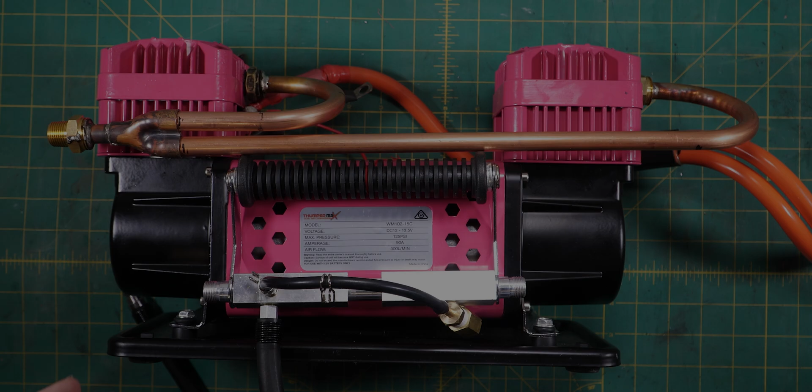In this episode of Lock Your Hubs 4WDing, we're fixing the external plumbing of the Thumper Max II. We're going to replace this low flow standard outlet manifold with a custom copper high flow outlet manifold that anyone can build with basic hand tools at home.

First up though, we need to understand how a reciprocating piston air compressor works. So let's have a look at that.

On the left hand side we've got the induction stroke, and on the right hand side we've got the compression stroke. It's very similar in operation to a two-stroke engine. Now we've got the crankshaft here, of course driven by that electric motor that's sucking down 90 amps.

We have the conrod here and the piston here. As you can see, the big end of the conrod is connected to the crankshaft but offset, with the small end connected to the piston. So as this turns clockwise, it drags the piston down.

When that happens, because of the seal between the piston and the piston wall, it creates a partial vacuum here. That then opens the reed valve and sucks air into the inlet.

And now for the compression stroke. As the conrod big end moves past bottom dead center, it starts moving back up towards the top, which in turn pushes that piston back up.

Now if we have a set amount of air inside that cylinder but we're reducing the volume, it increases the pressure — that's Boyle's law. When it gets to a certain pressure, it'll open that reed valve and push it out the exhaust, and then we can do actual work with it, like inflating our tyres.

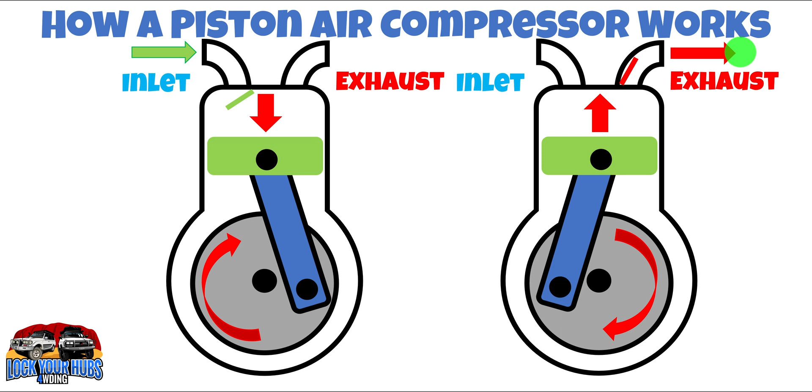And that's the basics of how a reciprocating piston air compressor works. Now that we have a better understanding of how these piston air compressors work, let's baseline this setup to find out how fast it turns with a standard outlet manifold.

Ordinarily, all I do is put a bit of reflective tape on the rotating assembly, point my digital tachometer at it, and Bob's your uncle. Unfortunately, our rotating assembly is under here and runs right through the middle, so I can't see it optically, but I can see it in other ways.

I thought to myself, perhaps using a pressure transducer like this one, I could see the peaks coming out of the outlet tube — one peak per cylinder per revolution. They'd be 180 degrees out of phase to one another. So all I'd have to do was look on the oscilloscope and measure the difference between three peaks, and that would give me the time.

But then I thought, hang on, I'd heard of this thing called a relative compression test. What that does is use a current clamp like this one in combination with an oscilloscope, and it reads the amount of current the DC motor's taking.

When the piston's heading up the bore, it takes more effort and uses more current, and the same on the other side. So what I'll be able to do — we'll shift to the screen in a second — is turn on the compressor for a second, freeze frame the output, and measure between our peaks to get the revolution speed of this Thumper Max.

And here's the standard head in all its glory. These are the inlet ports here, and on the reverse side are the exhaust ports. This is the cylinder side where the piston is.

Using a vernier caliper, we can have a look at what is the appropriate size pipe to use for our outlet manifold. You've got two inlet ports and two exhaust ports. The inlet ports measure about 6.75 millimeters across each, and the exhaust ports measure about 5.3 millimeters across each. That gives us a total inlet area of about 72 millimeters squared and a total exhaust area of 44 millimeters squared. You'll notice the inlet is a lot larger than the exhaust.

There's a reason for that. You have an ideal inlet to exhaust ratio of usually around 1.2 to 1.5 to 1. The reason is, when you're on the induction stroke, you only have atmospheric pressure, or 1 bar or 14.7 psi of pressure outside that cylinder, pushing air back in to fill up that vacuum. However, on the exhaust stroke or compression stroke, you've actually got pressurized air pushing it out. So your exhaust port doesn't need to be nearly as big as your inlet port.

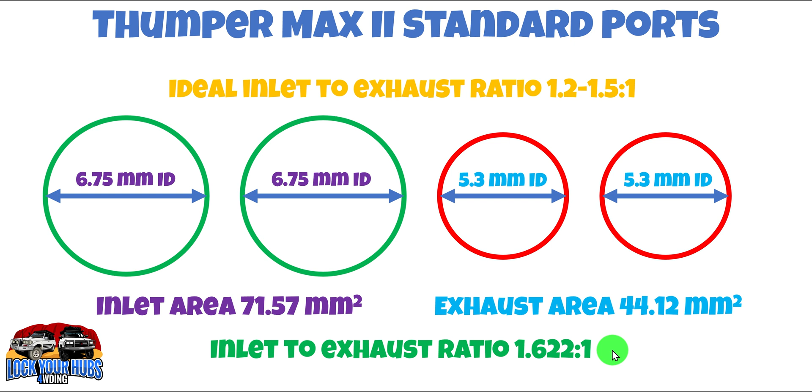Now the inlet to exhaust ratio of the Thumper Max standard works out to be 1.6 or thereabouts to 1, so not too bad. But as I say, I can't leave well enough alone. We're going to have a look at how big exactly we can hog out these exhaust ports in order to get this Thumper Max pushing as much air out as possible.

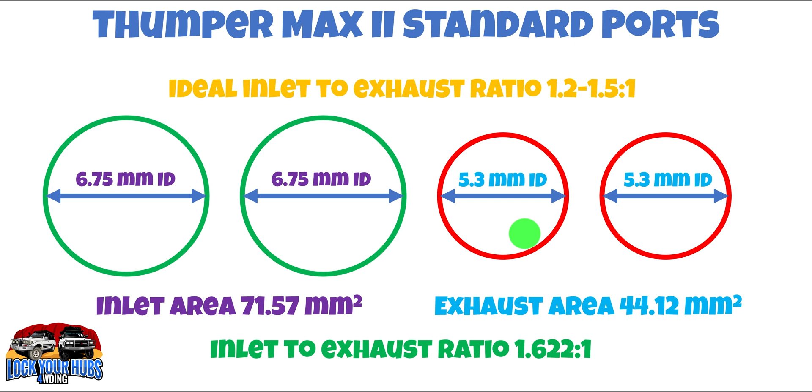And here lies the rub. Whilst our exhaust port is 5.3 millimeters, we still have an O-ring to contend with. That's a problem, because if we go drilling that out, let's say 10 millimeters, we're not going to have an O-ring sealing surface left and the thing's not going to work properly. The ID of that sealing surface is 7.5 millimeters, and we still need some material in between this point and the edge of our port in order to support that O-ring.

I figure I'm willing to go to 6 mil. So I'm going to drill these out to 6 mil and suck it and see. I'll let you know in the description if it doesn't work for me. But that's still an increased area of around about 28%.

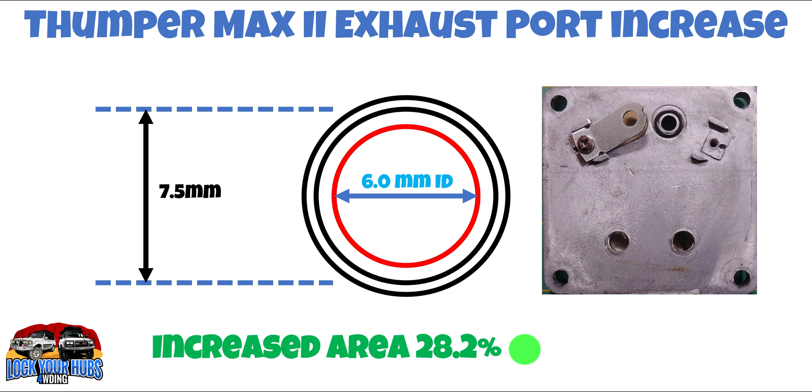And now we know the exhaust port size we're dealing with, we can start making intelligent choices as far as the inside diameter of the exhaust manifold we'll be fabricating. Here's our two freshly bored out 6mm exhaust ports, and that gives us a total exhaust area of about 57mm squared.

Let's have a look at a couple of different options of copper pipe we can use to create this exhaust manifold with: 3/8 and 1/2 inch. Now 3/8 copper pipe has an ID of 7.7 mil and an area of about 47 millimeters, whereas 1/2 inch is about 10.9 millimeters ID and has an area of about 93 millimeters squared. So our 3/8 pipe will be 18% undersized. It will provide a restriction.

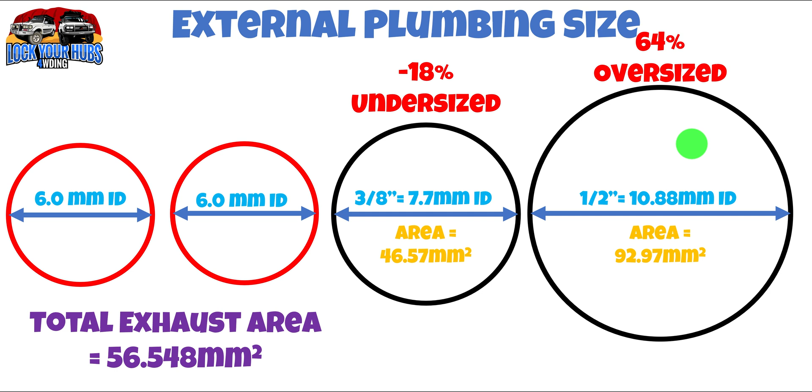What about our 1/2 inch pipe? Well, that's 64% oversized, so that should be fine, right? Or is it? It might actually be worse. Let's have a look why.

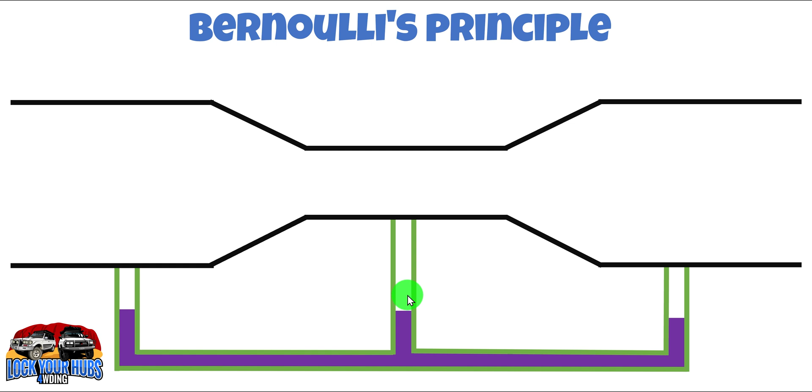And the reason is Bernoulli's principle. Bernoulli's principle states when you go from a larger to a smaller cross-sectional area, the smaller cross-sectional area will actually increase the flow rate, but the pressure will drop off counterintuitively. And when we go back to a larger cross-sectional area, the pressure will increase and the flow rate will drop off. This is a water manometer, and all a water manometer does is react to the amount of pressure in the system. So if we have low pressure here, water goes up the column, and if we have high pressure here, water goes back down the column.

So we'll flow some air through and see what happens to that water manometer. You'll see at this point in the system, obviously the pressure has dropped off even though the flow rate has increased, and the water has gone up the column. But you'll also notice a differential in height between this point and this point here.

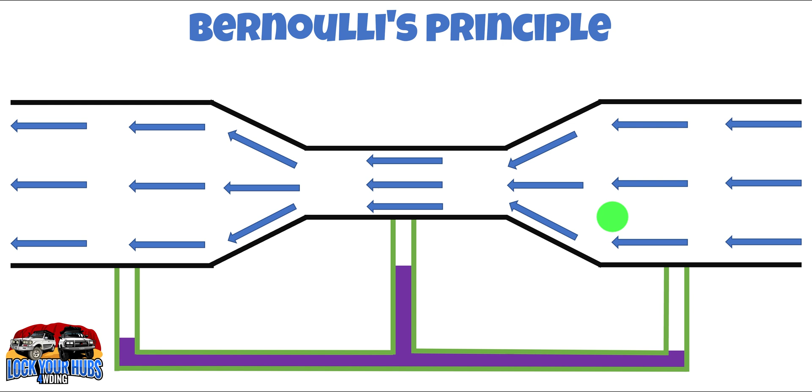The reason is we actually lose energy from the system when we go from one cross-sectional area to another. We lose energy, and that means less efficiency, and that means our tyres are slower to pump up. So the takeaway from this is to minimize the number of cross-sectional area changes you have in the system, and of those changes, minimize the delta, minimize the size differential between one cross-sectional area change and the next.

Because I was using plumbing fittings to create the exhaust port, I decided to drill and tap the head outlet port to a standard plumbing fitting thread. The one I chose was 3/8 BSP, which stands for British Standard Pipe. It's actually a tapered thread, so it's self-locking, even though you've got to use a little bit of Teflon tape on them to seal them up.

Now, 3/8 is 3/8 of an inch, but it's meant for 3/8 inch pipe, so the OD is actually much larger than 3/8 — it's just over 16 mil, about 16.6 mil. So I had to drill it to 19/32, or a scrap over 15 mil in metric, and that's what I'm doing here. And on with the tapping, you'll notice the soft jaws in the vise so we don't damage the head.

When you're tapping, you want to start that tap off in the hole as squarely as possible. They are more or less self-aligning, but you're doing yourself a favour if you start off square. Another thing to consider is the sides of that hole are parallel, but the tap is tapered, so it's going to get harder the further you bury that tap into the hole.

You'll notice me backing off every now and then, and that's to break the chip created by the edge of the tap. I'm also using a decent amount of lubricant. Ideally you'd use something like kerosene, but I think I've got a bit of CRC there, and that seems to be working fine. Periodically you're going to have to check the depth of the hole.

Remember, it's a tapered thread, so you get your fitting and wind it into the hole and make sure you're not too deep. And there you go, Bob's your uncle - a 3/8 BSP thread in the King's Thumper Max head.

Now let's show you some basics of using copper tube. Firstly, to cut copper tube, what you do is obviously mark up where you want the cut. Now this is a tube cutter - this is a much better way of cutting tube than a hacksaw. So you place the tube cutter approximately where you want to cut the tube.

All you do is run it around, turn it around 2 or 3 times, and then tighten up the nut a little. Keep doing that - loosen it up, couple more turns, and before long you'll have a nice clean cut in your copper tube.

And there we go. Last thing we need to do - the outside edge is already deburred by the process of cutting. We need to use some form of tool, and this is a deburring tool, to deburr that inside edge. Okay, now we know how to cut copper tube.

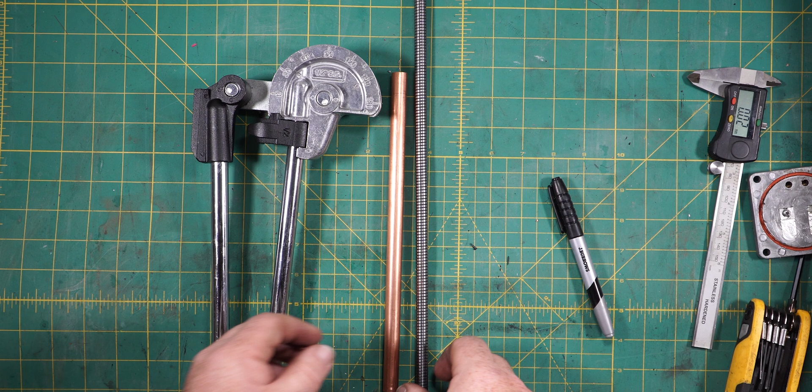Let's have a look at how we're going to put bends in it. Here's a couple of different ways of bending copper tube. Firstly, an internal spring - you can also get external springs. They just fit down there, and then you can bend with your hands, because it's only copper pipe, to the radius you want. That's one way.

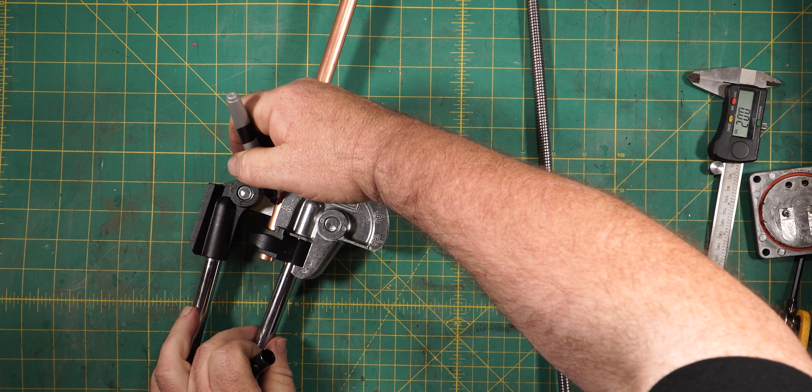Another way, and a little bit neater, is to use an actual bender. The way you use these is you put your copper tube inside the bender, and then grab your marker and mark off at your 0 degrees here. Let's say we want to put a 180 in this pipe. Rightio, so we need to get right around to the other side to 180 here.

Now hopefully I've got enough copper pipe here. And all you do, because it's only copper tube, is bend it around. Usually I put it on my knee or in a vise. Okay, so I've cheated a little, taken it off the bench and used my knee. But I'll keep bending it around on the bench here now.

And there we go, we're up to 180 degrees now. But the thing you would have noticed is it springs back a little bit. So what you need to do is go just a little bit beyond that 180 degrees, and then you'll get a 180 degree bend out of that copper tube. I'll take off the former.

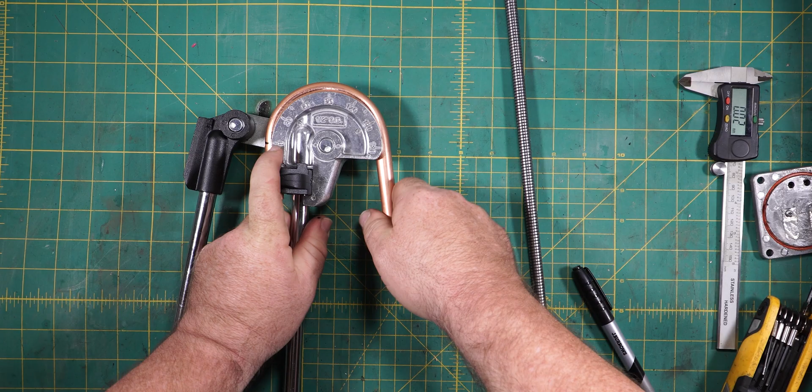And we'll pull it out. And there we go — a nice high-flowing 180 degree bend in that copper tube. So now we can get on with making our manifold and soldering it up.

So it turns out I accidentally deleted the footage of me soldering this thing together. So you just have to imagine me with a blowtorch and a bit of solder, dobbing this thing together. But quite frankly, there are better tutorials than I can produce on soldering copper fittings to copper pipe on YouTube.

So we finished the soldering and we've screwed it back together. It's time to test the RPMs, just like before. Now theoretically, if this outlet manifold has less restriction than the standard, perhaps the RPM should shoot up a bit. We'll test that now. Okay, so we'll turn it on for a second again, and we'll check how many RPMs it's doing.

There we go, we've frozen the oscilloscope, let's head over and check it out. So just like before, here's one cylinder, here's the opposing cylinder, and we're back to the first cylinder again. So all we do is go to the cursor mode and go to cross, measure in between this peak here and this peak here, and it turns out it's 5.06 milliseconds.

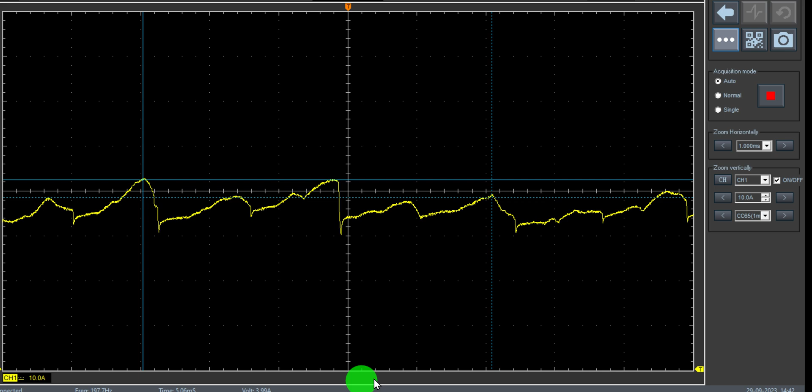Let's head over to Excel and punch that in. 5.06, and that's brought us up to 11,857 RPM. Let's compare the two.

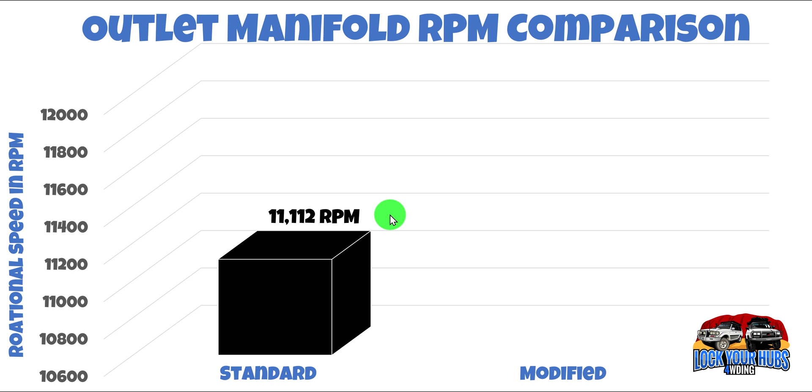And here are the results of the outlet manifold RPM comparison. Standard came in at 11,112 RPM. Modified, well, we got a slight gain at 11,858 RPM, and that's a 6.7% increase. Look, I'll take that, but I don't think we're going to realise the full benefit of our new outlet manifold until we actually port the heads.

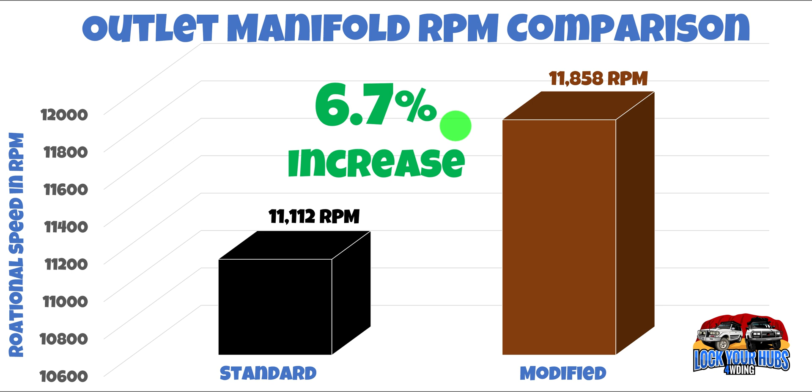So as they say, the proof's in the pudding, so let's head outside and pump up that 35-inch tyre. And we're ready to test again.

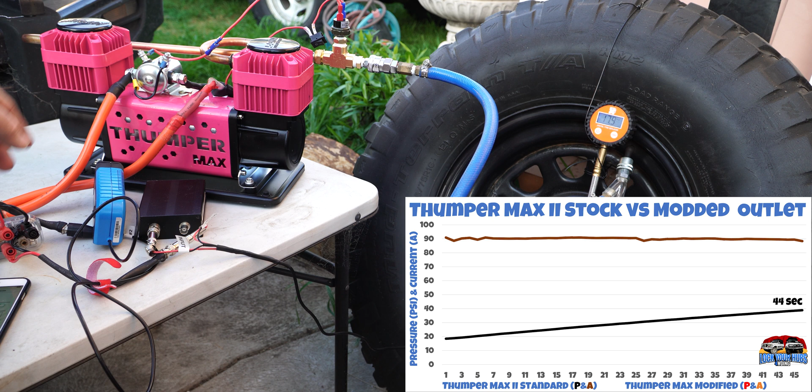So the 5 volts coming out there, heading down to the pressure transducer, that's being read by the Mooshimeter. Also got a current clamp here, that's also being read by the Mooshimeter and displayed on the phone. We're at 18 psi, as you can see on the gauge. I'll start the logging and we'll head back up to 38 psi.

Okay, that seemed pretty fast for me. We're back up to 38 psi.

Let's compare the results. And here are the final results. Thumper Max II, stock versus modified outlet. On the left hand side we've got the pressure in PSI and the current in amps. Along the bottom here we've got the time in seconds. So this is 18 to 38 PSI with just the electrical mods, 44 seconds in that 35-inch tyre, and it's at around 90 amps right throughout the test.

Let's have a look at the results with a modified outlet. 47 seconds — actually nearly 3 seconds worse off. So I think what's happened here is it's like putting a set of race extractors on a standard car. You're not going to get any additional performance, you're actually going to be worse off. It's more suited to a modified ported head. Well, at least that's what I'm hoping, and we'll find out in the next episode.

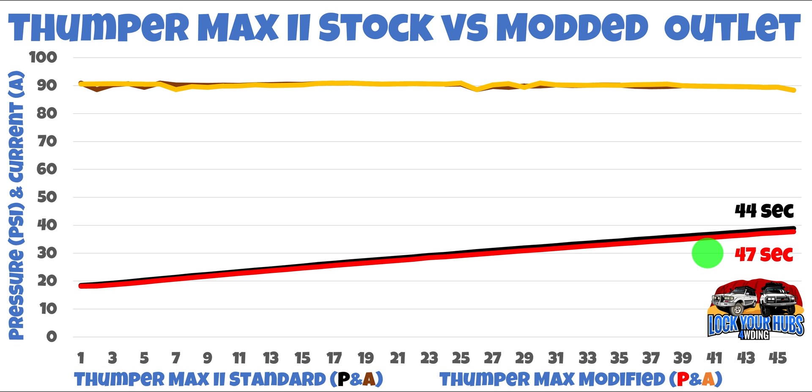So what do we think in the end? Is the outlet manifold an epic fail? Well, we won't be able to tell until we modify these heads in the next episode.